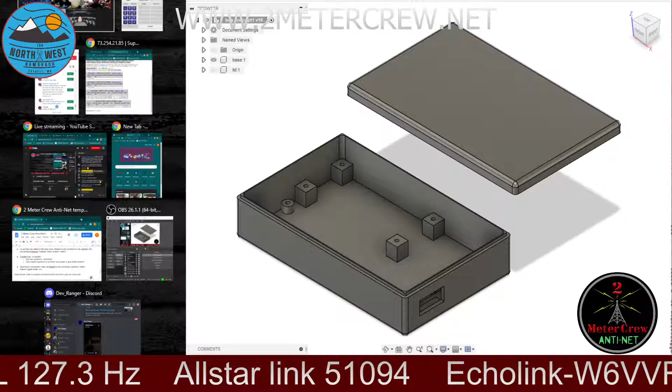Wow Nick, that looks really good. Did you make that? Yeah, I've made this from scratch so far. I'm assuming YouTube education to make that, because you actually beveled the corners and everything, even for a prototype. I'm quite surprised, actually.

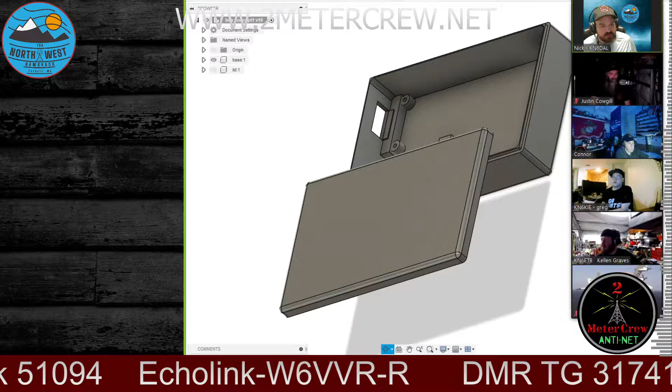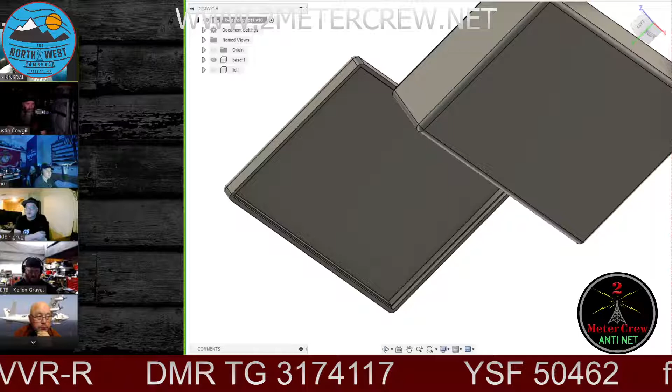All right, so this is the concept that I have so far. I haven't cut all the holes in it yet, but basically the design is that it's just lipped over right now, and I need to find a way - it's inset right here, and I need to find a way to either snap latch that because I don't have C channel. Then at the end, so how I did the design, I'll send it to you - I added C channel to it, and then at the back side it's sliding long ways, and on each end I put a little tab, but I never really figured out a mechanical way to keep it locked shut.

Because your idea was to put it in the pocket and walk around. Yeah, I had no clue what to do.

But that looks pretty solid, and you wanted that extra little space up there in the front, right? I need that extra space because coming off of the Raspberry Pi and the MMDVM hat is the antenna, which needs somewhere to be. I actually have one right here in my desk that I can show you - that's the antenna, it's just a little coiled antenna with a plastic cover that goes over the top of it. So this you can just put inside of the box.

For those watching on YouTube that are like, what's this simple box? Basically one side of it holds a Raspberry Pi Zero and an MMDVM hat, which creates a Pi Star essentially. And then this side is designed for a specific single 18650 battery backup that has an uninterruptible connection, so when you plug it in or unplug it, it doesn't trip power to the Raspberry Pi, so you can keep it powered up indefinitely. Then in one enclosure you can walk around with this in your pocket and a cell phone or Wi-Fi hotspot of some sort, and use any digital connection, whether it be YSF, DMR, or P25. Just fun stuff to play around with, but a pretty rudimentary design, as I'm maybe a week into learning how to operate the program, so it's taken me a little bit of time. People that know CAD are probably looking at this tree at the bottom going, oh geez.

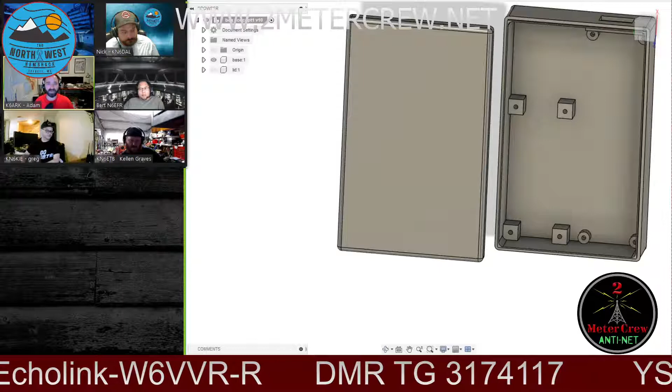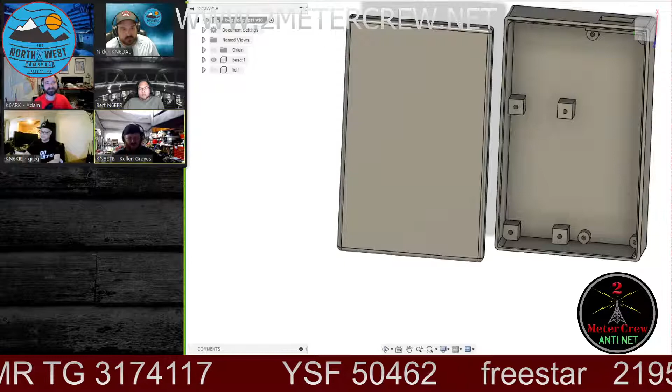So electrically, it's the same as a roll-up J-pole. A roll-up J-pole is an end-fed half-wave. It just has an open wire feed line matching network to it. So yeah, if you held that up at the same height as a roll-up J-pole, it should perform equivalently. Those are zero gain, aren't they? It radiates the same as a dipole. But efficiency is good because it's a full size antenna, so it radiates pretty much everything you put into it.

This is back to now, something on your HT is a hell of a lot better. No, for a radio mounted antenna, the best performance I've ever been able to get is out of one of those half wave antennas. They do incredibly well. That's what that MFJ is. There's also a smiley antenna version. That's what this one is in my hand. It's got a spring-loaded base, which is kind of nice.

Oh cool, so it's flexible. Yeah, I'm looking at that one. And they're, I think, 33 bucks, and you can buy whatever. So Adam, I got a question for you.

How do you feel about like I've seen people put counterpoises off of their HTs, you know, like hooking up a wire and connecting it here and actually running it, you know, it's almost like a dipole at that point too. Now I know these things are kind of built for your body to be the counterpoise, but I've seen people talk about it, and I've messed around with some before. I always figure where I'm at in my house, it's really going to depend, like when I'm listening to say the 33, one of the stations out here. Sometimes I've noticed I've tried messing with it, and I feel like the thing works better, but like Bryan's saying here, like a tiger tail or something like that. How do you feel about running like a counterpoise or something like that? Do you find them to be efficient? Do you think that this is something that's even worth somebody's time to give it a shot with?

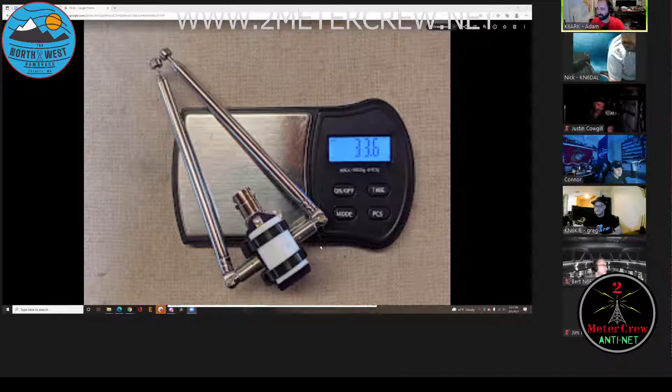It's pretty light, so it's a BNC connector. They finally loaded the full resolution image. A couple of folding 19-inch whips, 19.5-inch whips, whatever they are, extend out to be a 2-meter dipole, kind of like that. It's basically the Pac-10 trek mount, but a little smaller, lighter, and doesn't use HT antennas. It just uses a couple telescopic whips I had laying around. That's for 2 meter, basically. That's dope, man.

Are you selling that, Adam? No, I built it, and then I was like, I'm never going to use this thing. I've got a 3-element Yagi right here that weighs 5.5 ounces. Well, that's basically what BBQ did, but he took it and it's a little bit different, and then he just has his reflector and driven elements that go on his trekking pole.

It's amazing, this sits on a trekking pole, on the end of it, just to kind of hold it up. That was the intent behind that little piece of PVC I zip tied on there. Is it horizontally polarized, right? Yes, the intent of this was to create a horizontal dipole, or the other option is to point the radiating element up and the other one horizontal, making it basically a vertical.

So I tagged you in it, Adam, in our Discord. If you take a look, you should have a tag, you can see what he did. Is that a PCB board, Adam? It is, it's part of a failed experiment. I don't know if I have any pictures of that, but...

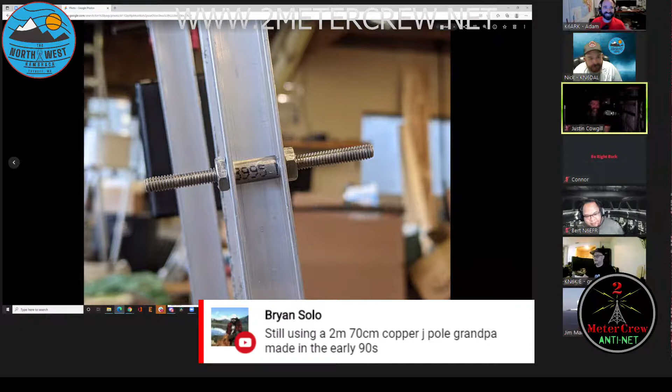That's the exact opposite of small - completely out here. That's the 16-foot 5-element 6-meter beam. That whole thing with the 12-foot mast weighs about 7 pounds.

I've got a similar match - I use the same type, a couple parallel pieces of 75 ohm to get 35 ohm, and then a quarter electrical wavelength gives you a match from 50 to 25 ohms or 28-ish ohms. So I used the same type of matching network on that 6-meter Yagi. Yeah, I have a very similar 2-meter Yagi that's partially built, I think an 8 or 9 foot boom with 6 elements, so I need to finish up the matching network on that one. That was a good video. This thing's a good video too, Adam, on the 6-meter beam. I saw that, I watched that one, I really liked it. Yeah, that thing works great, man, I'm really pleased with the performance.

But can you really take it to a mountaintop and expect to set that up in those winds? Have you seen what Adam's taken to mountaintops? I'm just saying, like the average person, right? That's the other flip side of this - there's the 'I'm so driven I'm going to make this work' versus the guy who's like 'I'm going to buy an antenna that didn't work, let me go buy another.' There's different parts - a mountaintop for Adam is different than most people. You should see that video, was it one of the recent ones where he was rock climbing? It was nuts. What was that one? Oh, yeah.